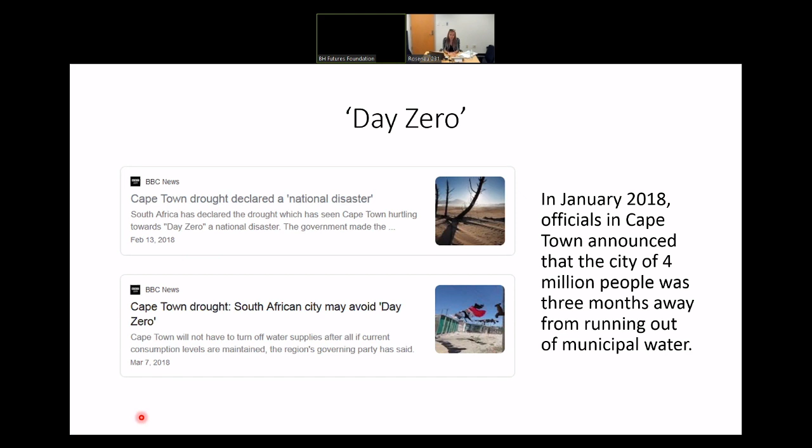As an outline for my presentation, first I will talk about membranes for water treatment and introduce a little bit of background: water scarcity, the role of reuse, and define a couple terms that will become useful later on: secondary effluent, natural organic matter, disinfection byproducts, and desalination. We'll talk about membrane types, the structure and active layer synthesis. And then I will go into a couple challenges relevant to the technology.

The challenge that my work focuses on for the most part is these leachates and byproducts. There are unknowns coming from these membrane materials, and my research group here is working to identify what those are and hopefully quantify some of those.

I'll also talk about biofouling. That's another major challenge: membranes, however powerful and effective they may be at removing some of these contaminants that we'll talk about later, are susceptible to something called biofouling, which is the accumulation of microbes on the surface. When that happens, their performance kind of degrades over time.

And finally, I will conclude the webinar with a couple of recent advances and research directions, some that I thought were really, really neat, not necessarily related to my current research particularly, but just some that I wanted to highlight to hopefully spark your curiosity into membranes.

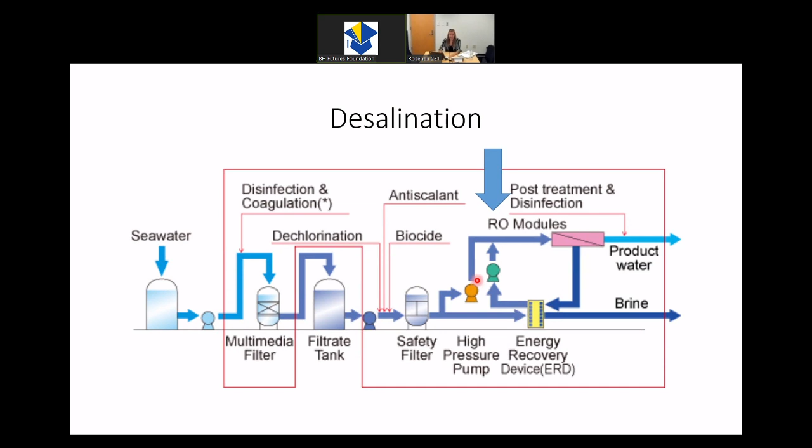Then here are the RO modules that the water would be going into, and the product water, or finished or clean water, would be exiting here and would subsequently be disinfected. And the brine, or the concentrated wastewater at that point, the super salty water, can recirculate through that system again.

So desalination was the first treatment train where membranes are important, and advanced water treatment is the second one that we'll talk about. But as I mentioned before, in order to understand advanced water treatment, we need to walk through conventional approaches to water treatment.

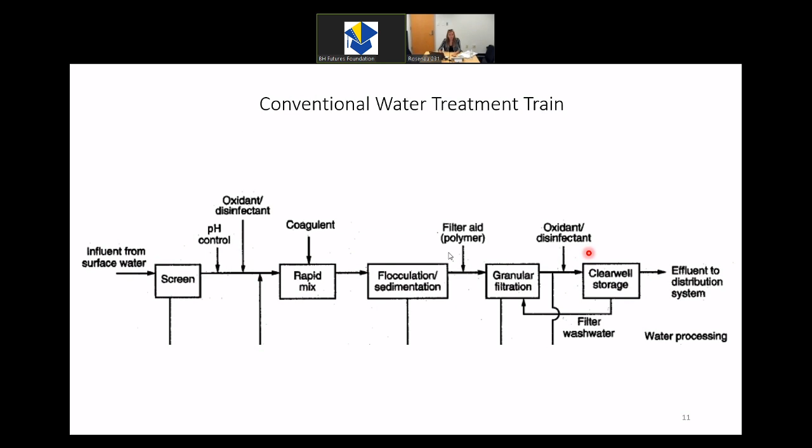So an interesting fact here is that when you add this disinfectant, in some cities, depending on the size of the city, water will have to travel for up to 15 days, if not more, before it reaches your home. So that means that residual needs to be high enough to last 15 days until it reaches the tap in your home.

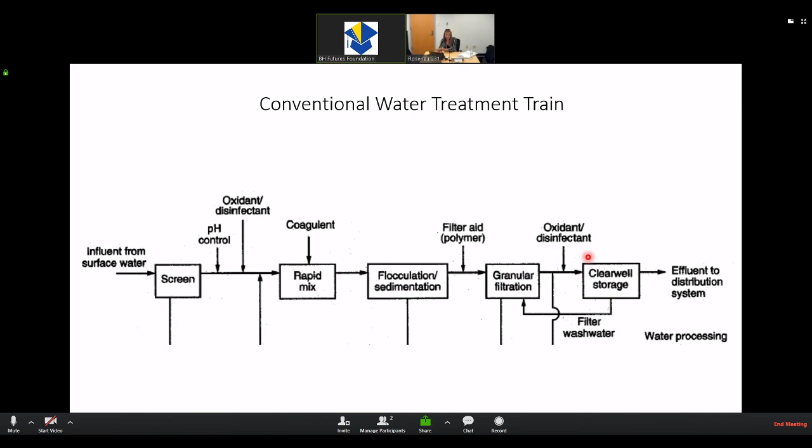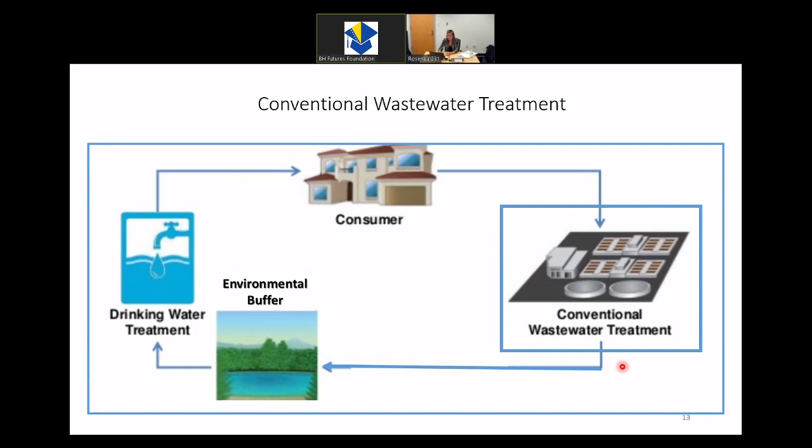So coming back to the big picture, now that we understand drinking water treatment and the sequence there, let's go over to conventional wastewater treatment. So once you've used the water that's delivered to your home, what happens to it then? The top here is just a very simplified sequence of the treatment steps. So again, preliminary treatment, just as before, the screening or grit removal, sedimentation to remove larger contaminants, larger particles. Secondary treatment, which is the activated sludge, and this is where bacteria can break down components. And then finally, tertiary treatment, which is the disinfection or nutrient removal, solids removal.

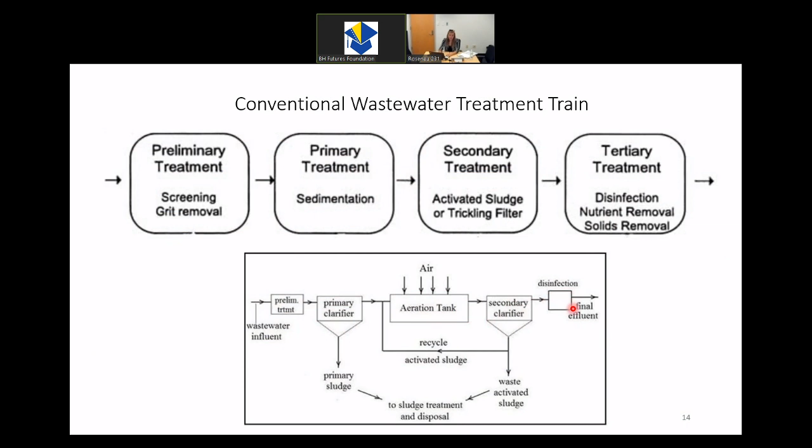And below here, you can see how these steps are connected. So the wastewater would come into the treatment plant. You have the screening, preliminary treatment, removing just solids. Primary clarifier, you wait for all of what has coagulated and settled to be collected into primary sludge. The aeration tank, which is where your activated sludge would be. And the secondary clarifier, similar to the first, and then disinfection, and finally it's the final effluent. So it is this effluent now that we are interested in.

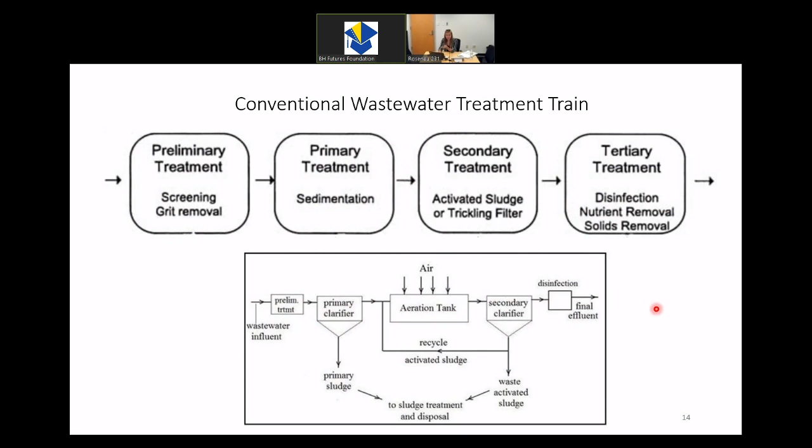So after that water that's been used leaves your home, goes to the wastewater treatment plant, leaves the wastewater treatment plant, what happens to it then? Well, this is now considered secondary effluent. So just to backtrack, we walked through drinking water treatment plants. We walked through what happens when it's sent to the wastewater treatment plant. And now it's considered secondary effluent. And all of this is background so that we can understand that now when we refer to advanced wastewater treatment, advanced water treatment, this is where membranes would come in. So this is where this technology would be placed. The secondary effluent is what the membranes would be treating in this potable reuse scheme.

So there's a neat distinction here between direct potable reuse and indirect potable reuse that's worth mentioning. Indirect potable reuse means that the secondary effluent that is treated by these membranes goes right back into the environmental buffer before going to a drinking water treatment plant. Direct means that right after it's treated here, it would go directly and skip the environmental buffer. So this is the last treatment train, I promise. So this is what happens at this stage.

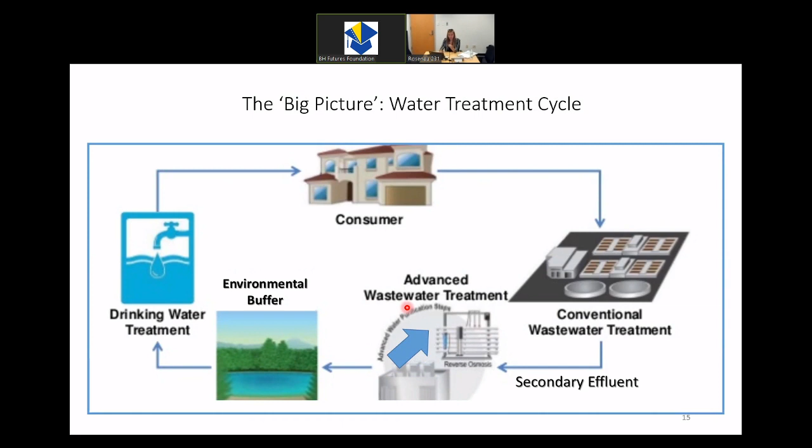So now that we've finally placed where membranes are in the whole scheme of conventional water treatment, let's look at what membrane treatment really is. So we're zooming into the reverse osmosis process here. The secondary effluent from that wastewater would come in. It would go through microfiltration, which we'll talk about in a little bit. That's also a type of membrane. It's different from the reverse osmosis membrane in that it's a low pressure membrane, and reverse osmosis is a high pressure membrane. Microfiltration is very often used as a step before reverse osmosis to catch any particles, to treat that water as much as they can before they send it to reverse osmosis, which is the highest filtration technology.

So after these protection steps of the reverse osmosis, here you see the reverse osmosis modules. This is what they look like, these white tubes. And each of these white tubes has a spiral wound RO module within it. So when I say spiral wound, what do I mean? Each of these modules has membranes, and membranes are like flat sheets of paper, but they're spirally wound in these tubes. And the feed water, or the dirty water that needs to be filtered, goes in through the side, and the permeate, or the clean water, would trickle through into the center.

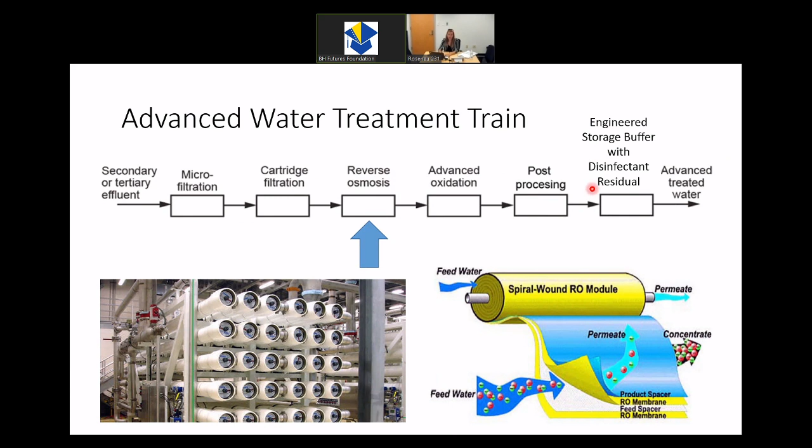So note that after reverse osmosis, you have advanced oxidation and an engineered storage buffer, disinfectant residual, similar to the drinking water. After it's treated, you have the disinfection. And that's now considered advanced water treatment, when you go from secondary effluent to supplementing a drinking water supply with what was wastewater before.

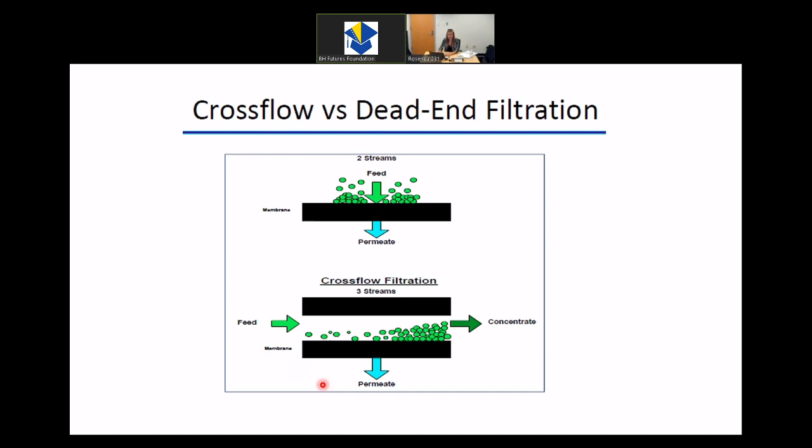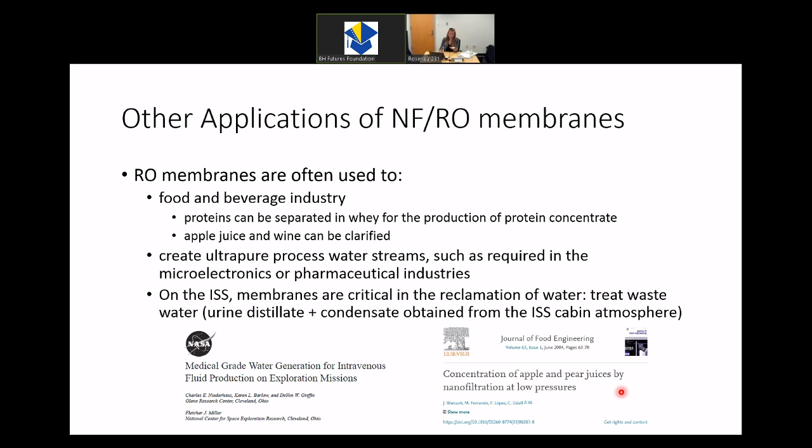Concentration of apple and pear juices by nanofiltration at low pressures. So that's another application. So the application that I will be talking about is for the water treatment industry mostly.

So there are four main types of membranes. Microfiltration, which recall was one of the protection steps for the reverse osmosis treatment step. Microfiltration often can reject suspended particles such as bacteria, dirt, or colloids. And as we go down farther, they become higher and higher in terms of efficacy for what they can reject. Ultrafiltration can reject macromolecules, such as fats and proteins.

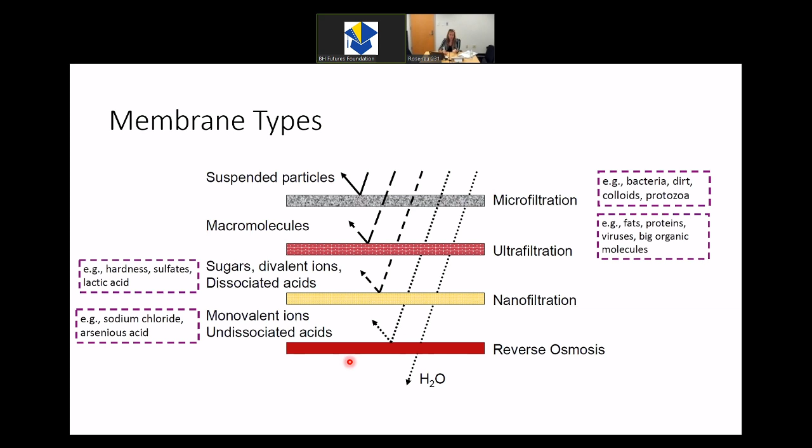Nanofiltration can reject sugars and divalent ions, such as sulfates. And then when you get down to reverse osmosis, you've noticed that only water passes through. That's the ideal. And reverse osmosis membranes can reject monovalent ions such as chloride. So I will be focusing mostly on the high pressure membranes, which are the nanofiltration and reverse osmosis membranes. The low pressure membranes are the microfiltration and the ultrafiltration.

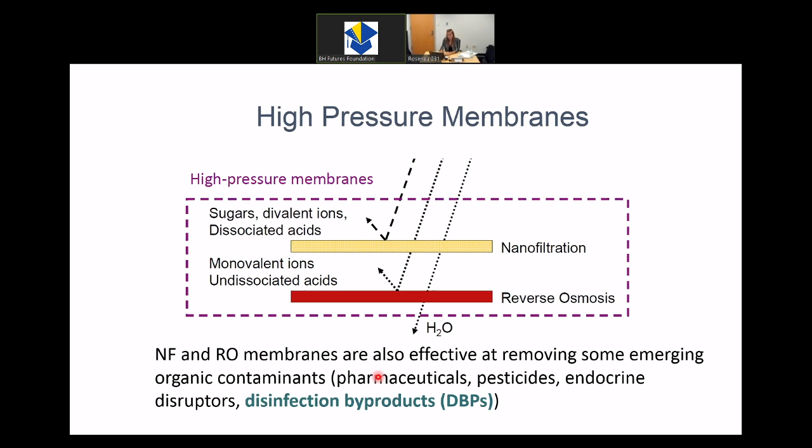So nanofiltration and reverse osmosis membranes are effective at removing emerging contaminants such as pharmaceuticals, pesticides and endocrine disruptors in addition to these monovalent salts. And then they can also reject something called disinfection byproducts. So what is a disinfection byproduct? Well, disinfection byproducts are a byproduct of disinfectants or oxidants such as monochloramine or chlorine, which are two really commonly used disinfectants in United States utilities for disinfection. And the disinfection byproducts form when that reacts with natural organic matter, which can be decomposing leaves, for instance.

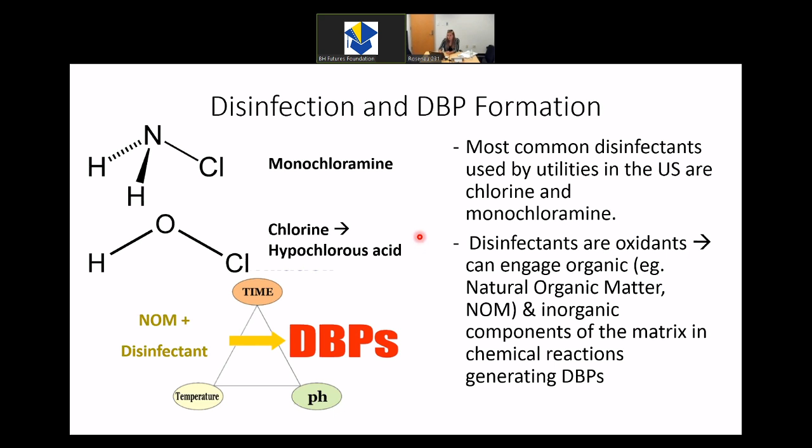So what is the maximum contaminant level and what is the maximum... MCLGs, maximum contaminant level goals, are non-enforceable health goals. They're based solely on possible health risks and exposure over time, and they take into account a margin of safety.

Based on these MCLGs, the EPA then gives us a recommendation for the MCLs, maximum contaminant levels. These are enforceable regulations, and they take into account cost, benefits, and the ability of the water system to detect and remove these contaminants. So these are more tangible targets for utilities.

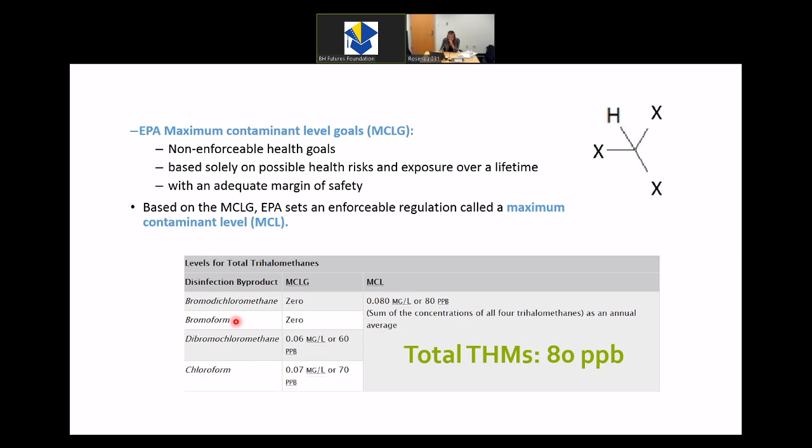So for the DBPs, recall that there were two groups that were regulated, the trihalomethanes and the haloacetic acids. For the trihalomethanes, the total THMs for regulation has to be below 80 ppb, and that's for all four of those listed there. For the HAAs, it's a little bit lower at 60 ppb, and again, that's for all five of the haloacetic acids. And there are over 600 types of DBPs that have been identified in chlorinated tap water. Anytime you chlorinate water for drinking water purposes, you will have disinfection byproducts present, most likely.

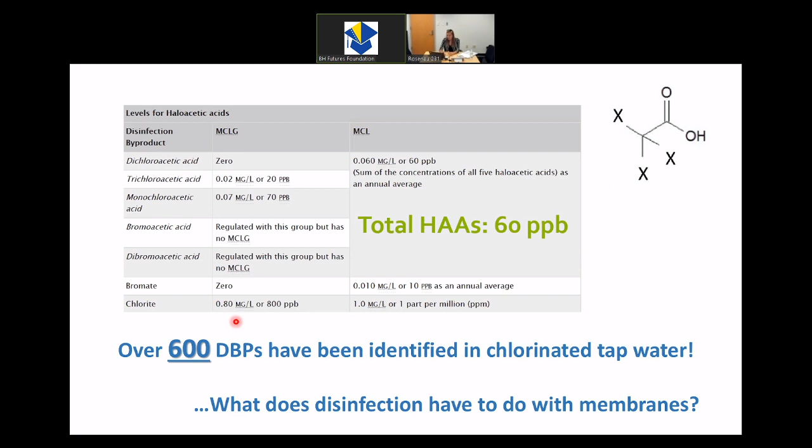So what does all this disinfection have to do with membranes? Why are DBPs even relevant to membranes? So remember when I said one of the challenges that membranes face is fouling. There are many types of fouling, but one of the main ones that I will focus on is called biofouling. Biofouling is a microbial accumulation on the membrane surface, and when this happens, there's a significant reduction in permeate flux. You need higher pressures for operation for these membranes to clean water. Again, these are high pressure membranes, so when there's a coating on them, you need more pressure to push the water through. And you have impacted rejection and water quality.

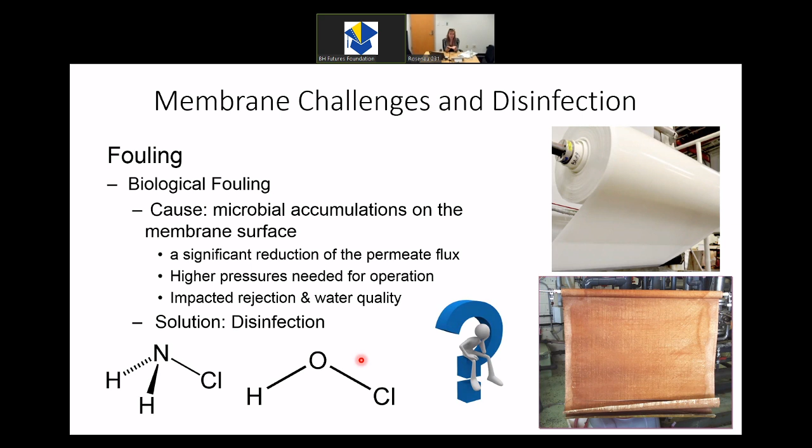So on the right side there, you see what a clean membrane looks like. This is not the spiral wound element, but this is what would be spiral wound inside. And then you have the biofouled membrane underneath. So what do we do to avoid this issue and maintain the integrity of membranes? So one solution, the most common solution, is disinfection prior to the membrane with either chlorine or chloramine. So the disinfection byproducts that I was talking about earlier, that's the bridge for why that would be relevant.

So if you are disinfecting prior to a membrane, disinfectants can damage that polyamide layer, that top very thin layer of the membrane. And it's important to make sure that the chlorine is dechlorinated, or there is a step to make sure that the residual is less than 0.1 milligrams per liter, so that there is not damage to the chemical structure that is the polyamide layer. So after the water passes through the membrane, then you will likely have another chlorination event for the residual.

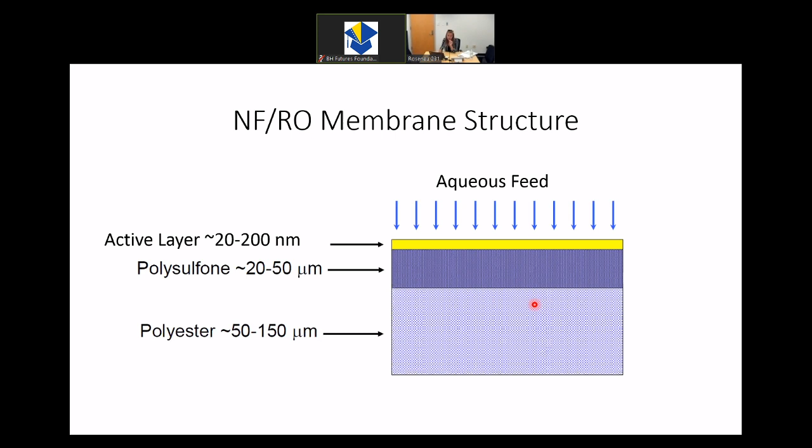20 to 50 micrometers in thickness, and the polyester layer is between 50 and 150 micrometers in thickness. So the aqueous feed, or the dirty water, would come in contact with the active layer and permeate that way. So we're going to go back a slide here. In terms of preparing that top yellow layer, the active layer, that's the layer that's the main contaminant rejection. That's the layer that is most responsible for cleaning your water.

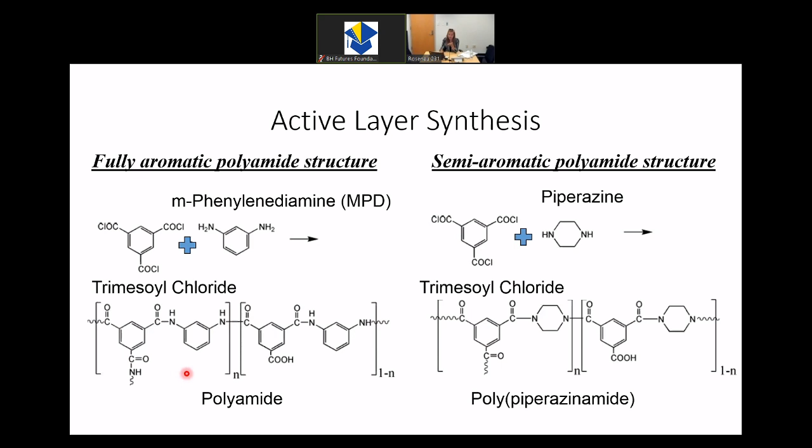And for the nanofiltration membranes, those can be either semi-aromatic or fully aromatic. So in a recent study, there was evidence that there's some kind of precursor leaching from nanofiltration membranes. So this study looked at 5 various types of nanofiltration membranes, and they measured using something called formation potential. They measured what is leaching from these compounds.

So they use something called a formation potential test, which means you take the sample post-membrane treatment and you react it with a disinfectant. What they used was chloramine. So why react with a disinfectant, and why does that help you see if you don't know what you're looking for anyway? What this helps you do is that the disinfectant will likely, if something is there, react, similar to how the disinfection byproducts formed when natural organic matter reacts with disinfectants. This chlorine, or chloramine in this case, reacts with whatever is coming off of that membrane, and then we have methods to measure that.

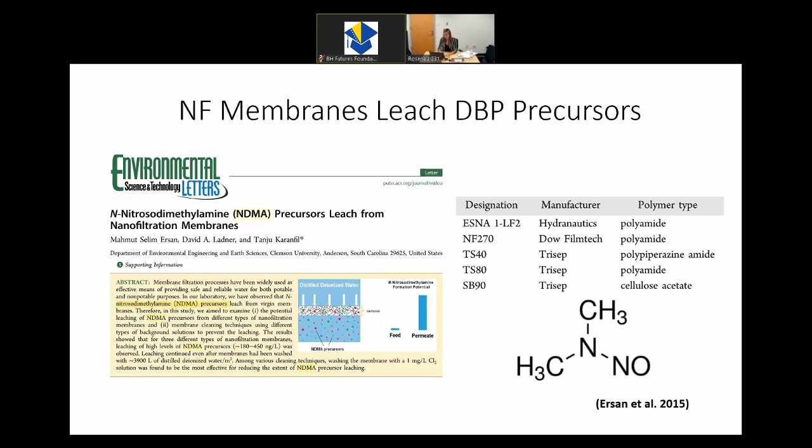And once we identify what that is, how is that then impacted by chlorine, and what subsequent byproducts can we get from that? Because if the membrane is contributing compounds to the water that are then being disinfected, it's really important to understand the leachate as well as the byproducts that might come from that.

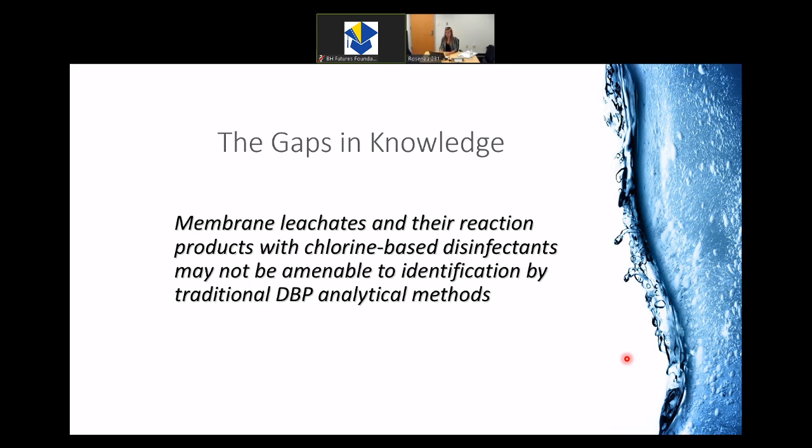So the first objective we had was to develop methods to detect some of these leachates from nanofiltration membranes. When I say develop methods, that's everything from the concentration procedure. We use both liquid and solid phase methods, which is something I'll get into a little bit later. Liquid and gas chromatography was used in these studies. And these are just analytical tools that we've coupled together to give us the most precise, most clear understanding of what we see in this unknown matrix.

For detection we used ultraviolet detection. We used an electron capture detector. Electron capture detector is one of my favorites. GC-ECD lets you see low molecular weight compounds that contain an electronegative atom. And we also use mass spec. However, using conventional LC-MS, or liquid chromatography mass spectrometry, is quite challenging when you don't know quite what you're looking for. That's why we use something called derivatization, and I'll get into all of this a little bit later.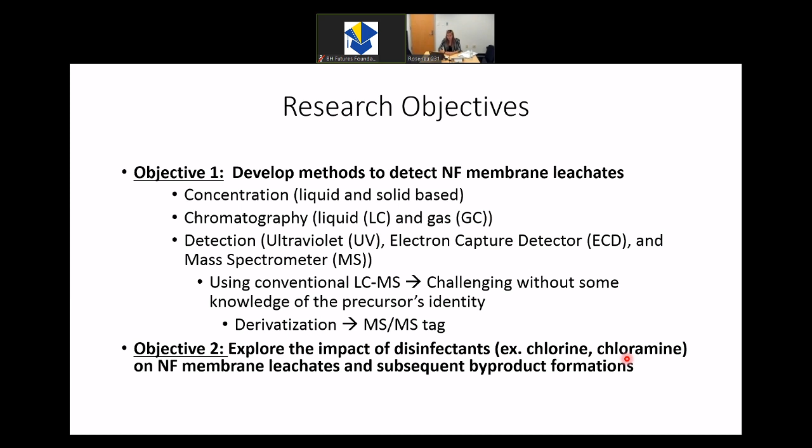So the membrane that we selected to begin with is an NF90 membrane, and just to remind you, it's the fully aromatic structure, trimesoyl chloride reaction with 1,3-benzenediamine, also known as MPD. That's the structure of the membrane that we use for these studies. Molecular weight cutoff means anything that's above a molecular weight of 100 to about 200 is typically rejected. That's how tight

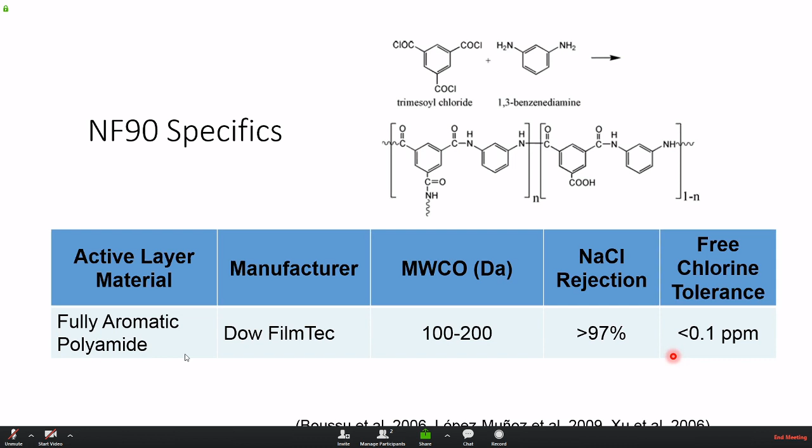the filter is. The NaCl rejection, or sodium chloride rejection, is greater than 97%. And the free chlorine tolerance, remembering that these membranes are sensitive to chlorine, is less than 0.1 ppm. Challenge, because now you're trying to concentrate things that you don't know what they are.

So typically, when you're using solid phase extraction, or SPE, you would pick a solid phase cartridge. So these are these cartridges right here, this tiny little bit of solid phase. Your sample is run through these cartridges, and these little solid phase areas will retain the analyte in your sample. And then afterwards, when your sample has passed through, you take a solvent of another kind to elute that and release those into your sample tube.

Typically, when you're selecting SPE cartridges, you would go with properties that are consistent with things that you're looking for. So for instance, if I have a cation that I'm targeting, then I would probably get a solid phase that's a strong cation exchange resin so that I can capture cations. Unfortunately, because we don't know what it is that we're looking for, we had to take a little bit step back

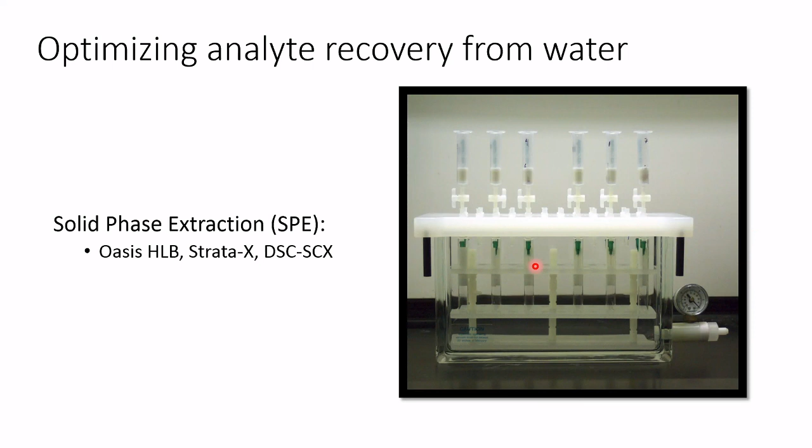and use a more broad screen approach. So what we used is the Oasis HLB cartridge. HLB means hydrophilic lipophilic balanced copolymer. So what this means is that it's ideal for a broad screen analysis because it will retain a broad screen of analytes. So hydrophilic meaning water loving, lipophilic water hating, instead of zooming into a particular characteristic. So HLBs are a broad screen, general first-hand approach.

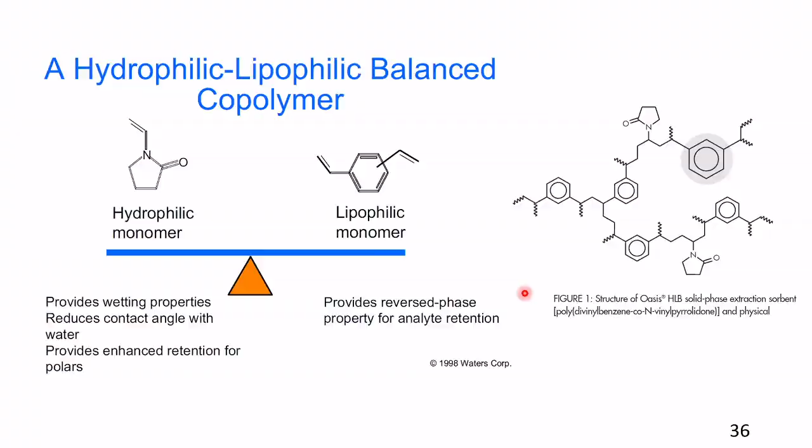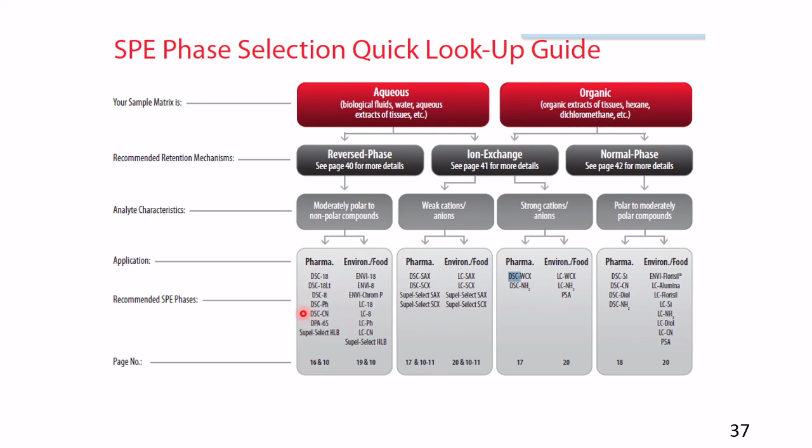For future reference, though, if you're looking for SPE that would fit your matrix, you would look at whether your matrix is aqueous or organic. You would look if you're interested in strong cations, weak cations, polar, nonpolar compounds, and then kind of use this diagram to help select which type of solid phase that you need. But again, since we didn't know, we went with HLB.

So a little bit about our methods. We took a membrane coupon and we just reacted it in a static bottle, sample bottle, with lab grade water. We kept it on a shaker for 4 hours. And we left it there for 7 days at room temperature to see if anything comes off of those membranes and if we can capture it in that lab grade water. Then we'll run it through that Oasis HLB, the broad screen capture, and hope that our analytes are captured in and retained on this cartridge.

Then we eluted that with acetonitrile, so my sample went from 100 mils to 3 mils. In hopes of further concentrating that, we can use something called a blowdown, which will evaporate extra solvent and hopefully retain your analytes in the sample. So then we blew our 3 mils down to dryness, until the sample was gone. And then we reconstituted that in 500 microliters of acetonitrile, which we then analyzed.

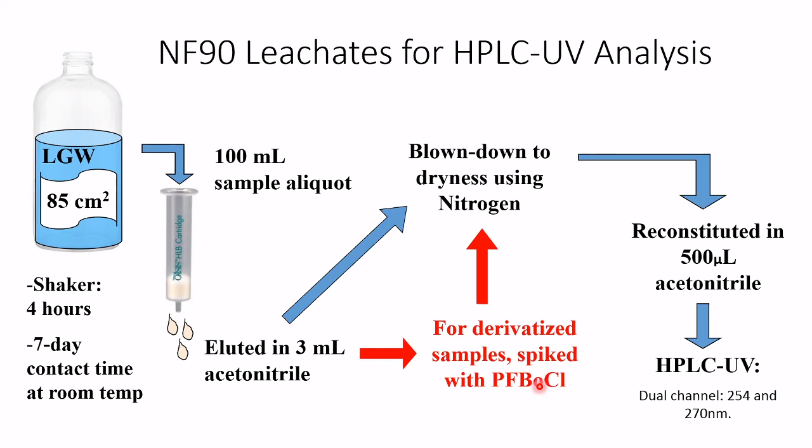And you'll notice here in red that some samples were derivatized. That's something we'll talk about in the next slide, but derivatization is useful for tagging compounds. So in blue is our generalized approach for looking at membrane leachates. And here in red, we decided to derivatize a subset of those. We'll react with pentafluorobenzoyl chloride, which is our derivatizing agent, and then that we can look for as a tag.

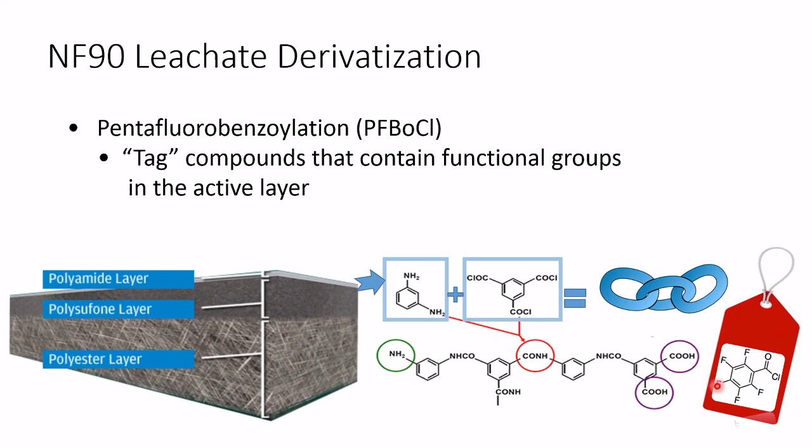So if you look here, polyamide layer, top layer of the membrane, we have those two monomers that reacted, that created this fully aromatic structure. And now we're reacting it with pentafluorobenzoyl chloride to hopefully tag some of these functional groups. So if something is coming off, pentafluorobenzoyl chloride can react with amines and amides, for instance, and here's an amine. It can react with those functional groups, tag it, and then you have a way to search for these fluorinated groups if they're there.

So LC-UV can tell you if there's something that is able to absorb at a particular wavelength. Right now we were monitoring at 270 nanometers. Basically all that means is if it absorbs light at a particular wavelength, it'll be able to tell us. What it's not able to tell you is structure. So this is not a mass spec. It can just tell you how much of a compound that has a chromophore is there. A chromophore just means ability to absorb light at a particular wavelength.

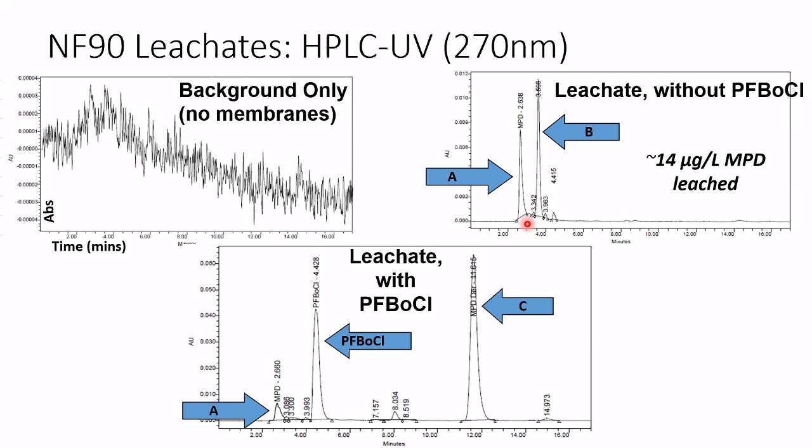So we use something called a QTOF-MS. It's called the quadrupole time of flight mass spectrometry, and it combines high performance time of flight analysis with mass spectrometry. So what this means, why it was appealing to me, is because it has high sensitivity and high mass accuracy. So if I'm looking for structural confirmation, this is a really useful instrument to have.

So when we ran those same samples on a mass spec, the same samples that we saw, okay, now there's something coming off of the membrane, we see it on this instrument that can't tell us the structure, but we still have those samples. Now we can run those samples on a mass spec, and we can go peak by peak and figure out what the structures of those are.

So here, you'll notice that this happens to be the identification for M-phenylene diamine, which was one of the monomers used in the synthesis of membranes. So that was interesting to see that, okay, one of these excess monomers is coming off. So there are subsequent questions, right? How long is it coming off? How do we clean this off the membrane? So we kept going.

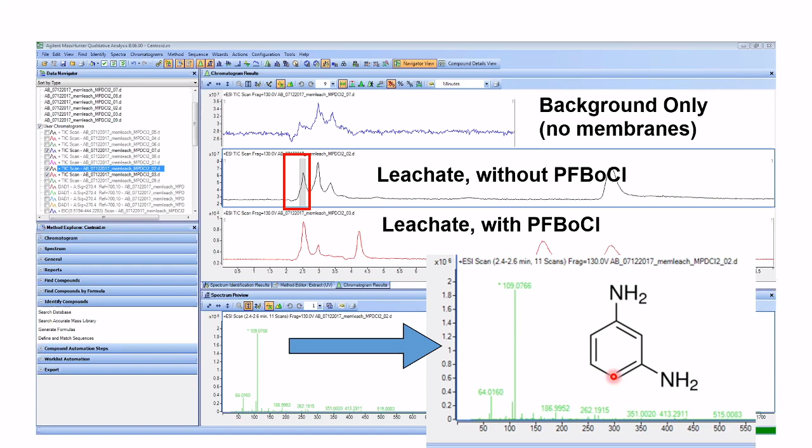Here, again, the structure of the derivatized MPD. So previously, the mass spec told us, okay, MPD is leaching. This is one of the compounds used to make the membrane, so that was expected. And then MPD is able to react with the pentafluorobenzoyl chloride, and we have a tag, and now I can see that has reacted.

So since MPD is leaching from the nanofiltration membrane, there are some subsequent questions that come up. Like I said, how long is MPD a residual leachate? And also, how are these leachates, going into objective 2 now, how are these leachates impacted by chlorine?

So solid phase extraction is not the only way that we can concentrate samples. And to be able to look at some of the byproducts of a reaction between MPD and chlorine, or to see how chlorine impacts MPD, we need a different kind of concentration mechanism. So solid phase extraction, which is what we talked about earlier, is fantastic for non-volatile compounds, so compounds that won't be lost into the atmosphere.

Liquid-liquid extraction, however, LLE, is useful when you're working with compounds that are volatile, and justifiably so. They will then be analyzed on a gas chromatograph, so it'll be using that volatility to help separate those compounds and analyze them.

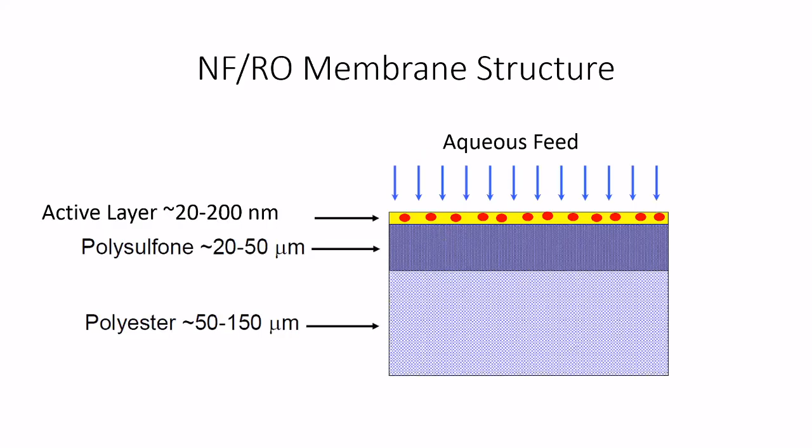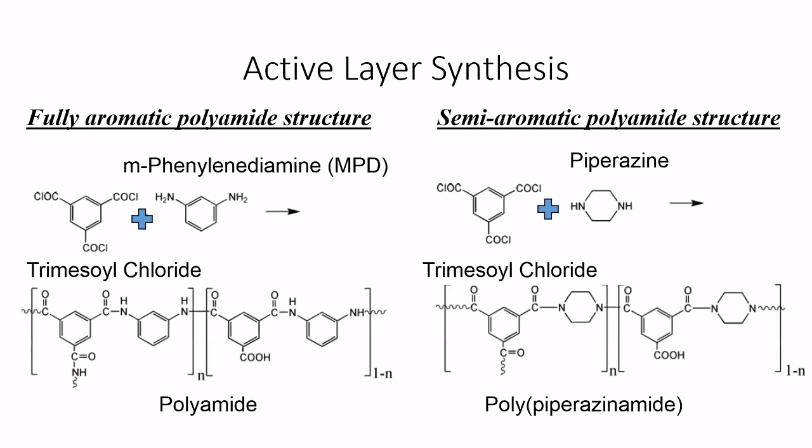So Alma, while you were having the first part of your presentation, we got questions from Ali from Tuzla. Actually, a lot of questions, so if you are ready, you can start answering them. First of all, thank you for the great presentation, it was pretty interesting, even for me, who am an IT expert. So, it's Ali Mokais. He's sending you greetings from Tuzla, and he has a few more general questions.

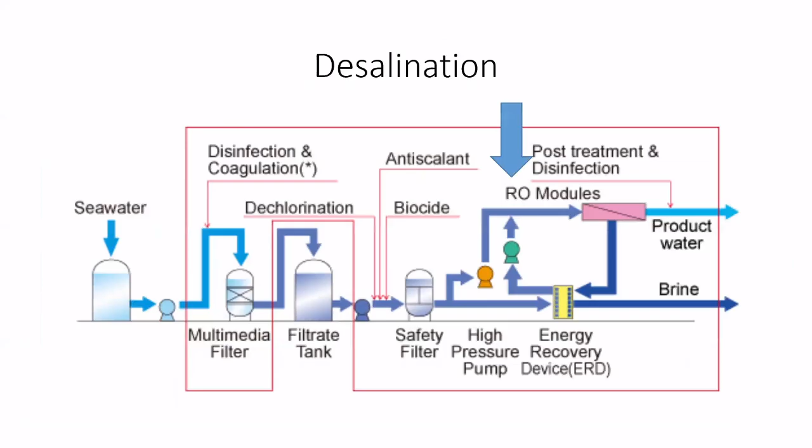So, there are many water contaminations on macroscopic and microscopic levels. Also, one of the most talked about recently is plastics and microplastics. So how do you see engineers of the future best addressing the issue? And besides them, what else can be done to tackle this colossal issue?

So for microplastics in particular, I don't think that membrane technologies would be the first channel or the first barrier there. I do not work with microplastics, so I'm going out on a limb here, but I'm pretty sure that microplastics themselves would accumulate on that membrane. But for instance, if a membrane can reject monovalent ions, then it would likely be able to reject some of these microplastics. But this would be a very, very expensive application of the technology. I think you'd be stuck with fouling of the membrane surface, and you'd end up having to clean these membranes. And every time you have to clean these membranes, they use chlorine washes or acid-base washes.

Every time you do that, these membranes are more and more damaged in that process. So in terms of a solution for microplastics in the grand scheme of things, I don't think I have that answer, but I don't know that membranes would be helpful, but perhaps not the first barrier.

But that means that the rest of that is brine now, or very, very salty water, and it's because it's rejecting sodium chloride. It's called the concentrate because it's concentrating up the sodium chloride. And then what do you do with that? So actually, that's a really insightful question, because several conferences that I've gone to have focused on just that. How do you eliminate or dispose of a brine now?

Because can you put it back into the ecosystem, and you're increasing the salinity of that ecosystem. To what end, right? To what degree? That I probably couldn't answer, because you're right. The ocean is vast. How much are we actually changing the salinity of the ocean? Cannot say. However, I could say that probably locally, where those discharge points are, undoubtedly there are some impacts that are going to be present because of the change in salinity.